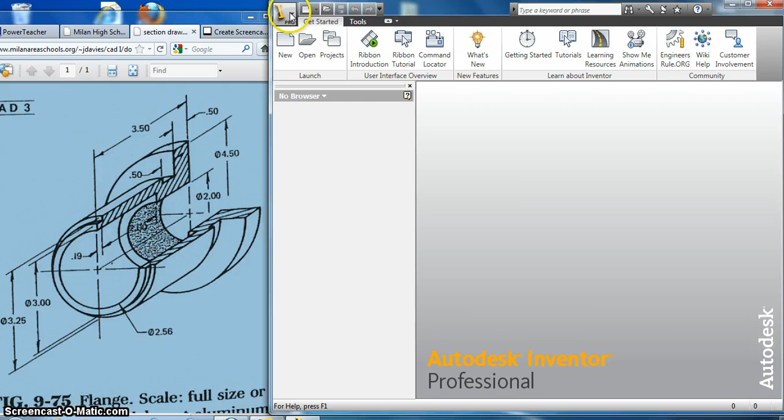So let's come over here to Inventor. I'm going to come up to new, and I'm going to do a new part. Our first circle that we're going to draw is a 4.5-inch diameter that we're going to extrude up at 0.5. So I'm going to come over here, draw my circle, just type 4.5. There's my 4.5-inch circle.

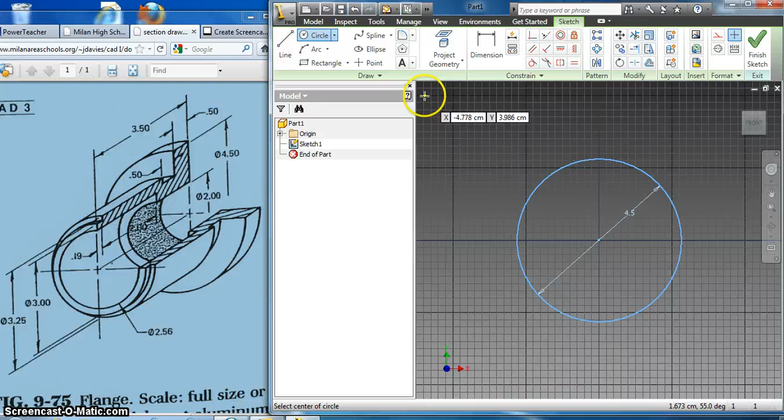I will right click done, right click finish sketch, and then I will extrude that circle at 0.5. So there's the bottom one. The second circle that goes on top of this one is a diameter of 3.

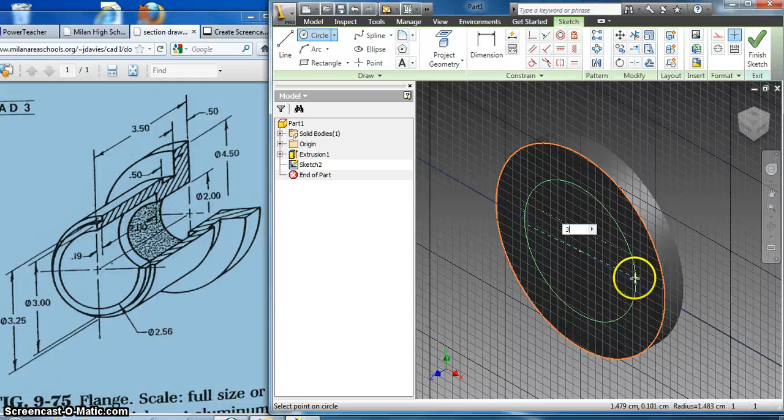So I'm going to right click new sketch, this face. I'm going to draw a circle from that center point, pull it out and type 3, enter. Right click done, right click finish sketch. And that is also from here to here is 0.5, so I'll extrude that circle at 0.5.

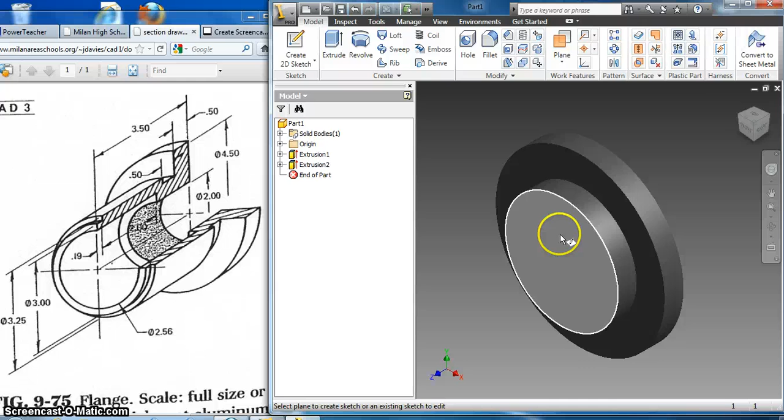And then I've got a big circle that comes out here, and it says the diameter of that big circle is 3.25. So I'm going to right click new sketch on this face. I'm going to draw a circle from the same center point as all the other ones, and I'll do the 3.25, enter. Slightly bigger than the other one. Right click done, right click finish sketch.

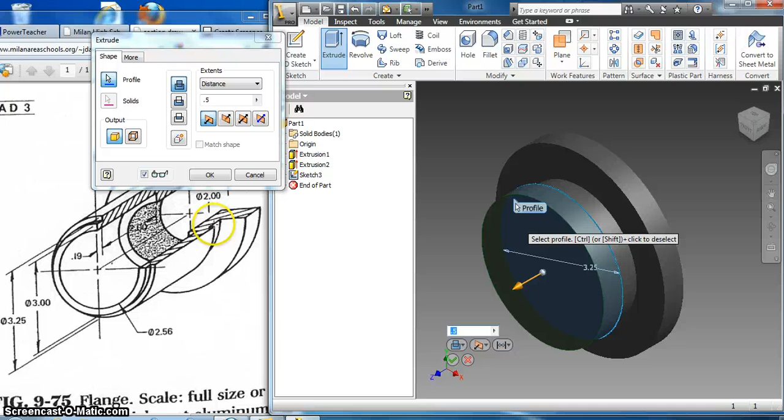We're going to extrude. Now this is where it can be tricky. I've got to select probably two different - see it's highlighting just the really thin part, so I got to select here and here. So I got to select two separate circles to get the entire thing to be extruded. And I believe it says, you can hardly see it over here, I think it says 2 inches right there. So I'm going to come in there and type 2, hit enter.

And then finally, I've got another last one, this little 3-inch diameter. It's going to come up 0.19. So I'm going to right-click New Sketch on that face. I'm going to draw a circle from this piece at a diameter of 3, enter. And I'm going to right-click Finish Sketch. I got to extrude at 0.19.

I didn't select what I wanted though, it was just this one. So now I've kind of got the ledge and I've got everything on there, but now I got to get rid of the inside parts of it. And it's a counterbore looking piece, which is just a really elongated something that we're not used to seeing as much.

So I'm going to right click New Sketch on this face. I want to draw a circle again from that same center point that we've been doing. And again, it is a diameter of 2.56. So 2.56, enter. Right click done. Right click finish sketch. I'm going to extrude it.

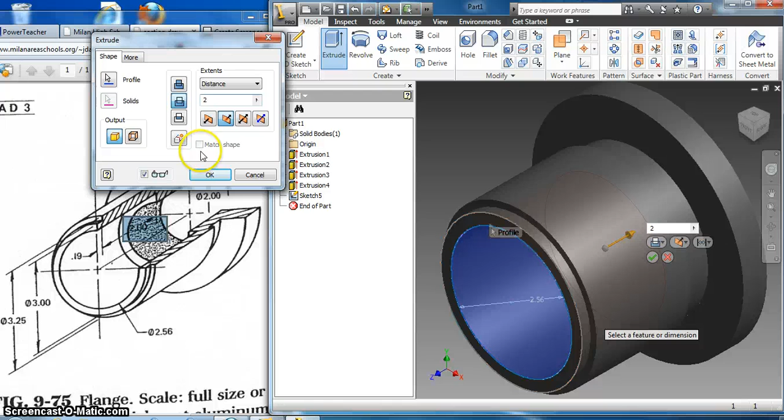This piece, I got to make sure I hit cut right here. Cut. And then I'm going to come down 2 inches again. So you can kind of see that it gave you a highlighted red thing in here. So it's down 2. I cut it, hit OK. So now I've got the hollowed out part here.

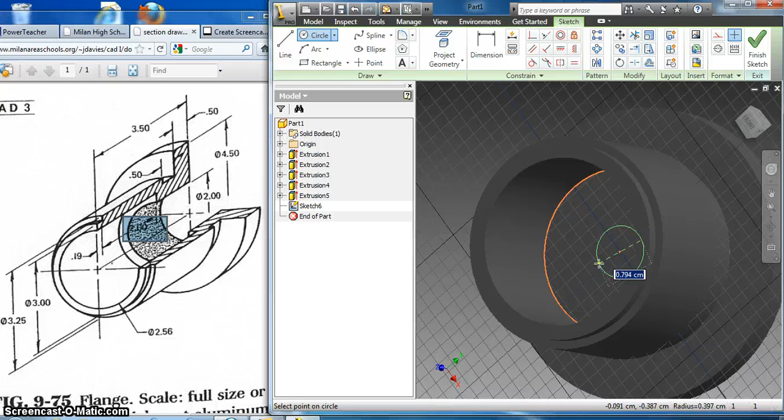So now I got one more circle to put in here. So I got to right click New Sketch on the very inside face of that counterbore. And I'm going to draw another circle from the exact same center point that we've been going. And this diameter is a 2-inch diameter. So 2, enter. Right click done, right click finish sketch.

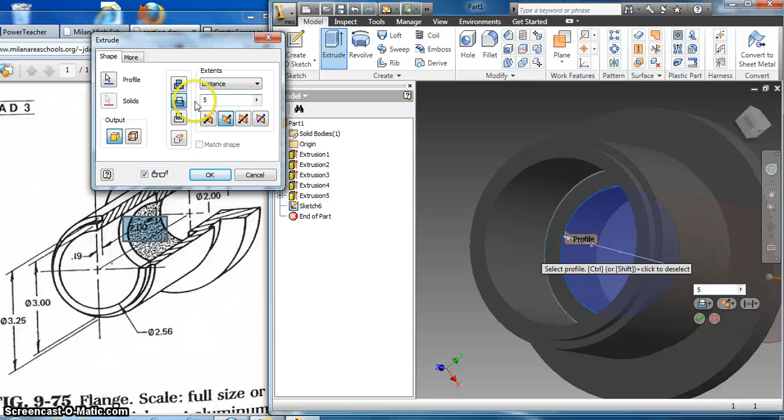I'm going to extrude that circle. I got to cut it. And I'm going to type in like a big number, like a 5, just to make sure that it goes all the way through the part. And now you can kind of see that I've got the part that goes through the whole thing.

So 9-75, the drawing itself is done now. So I've got - let's do a save as here. I'll save it as 9-75.

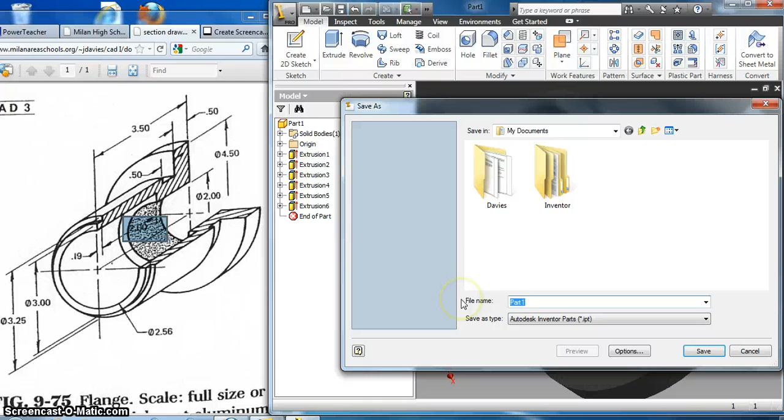Now once it's saved, we got to put this into a section view. So I'm going to come up here to new. I'm going to do a new drawing. Yeah, you know what I did? I just erased a bunch of stuff off my computer yesterday, and I thought that might happen.

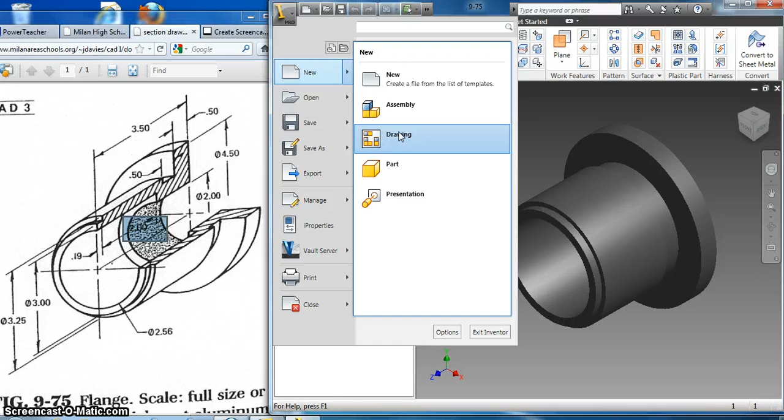Hopefully, maybe you can remember at this point, you're going to open up a new drawing. When you go to the new drawing, you're going to put in a base view of this one. You're going to hit the section button up top, and you're going to cut a section out of this part. That is figure 9-75.